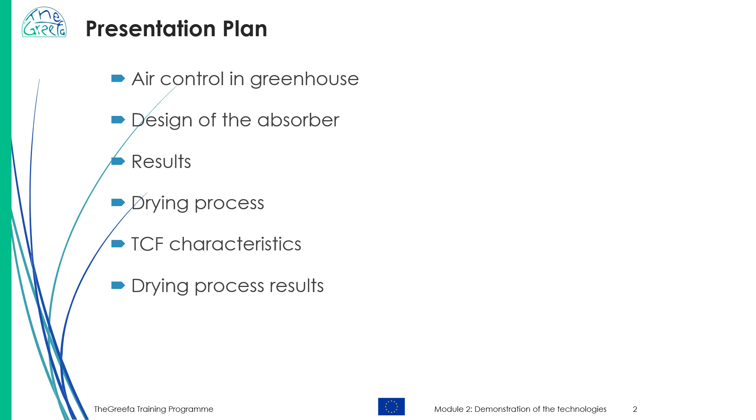Here's an overview of the following presentation: air control in the greenhouse, design of the absorber, results, drying process, TCF characteristics, and drying process results.

In Module 1, we introduced TheGreefa's use of liquid desiccants, known as thermochemical fluids, short TCF. These fluids, typically salt solutions like sodium hydroxide or magnesium chloride, share a common trait. Their hygroscopic properties allow them to absorb water vapor from the air, simultaneously releasing sensible heat converted from latent heat stored in the vapor. To illustrate the process, absorbing 1 ton of air humidity in the greenhouse releases approximately 680 kilowatt-hours of heat due to the phase change involved.

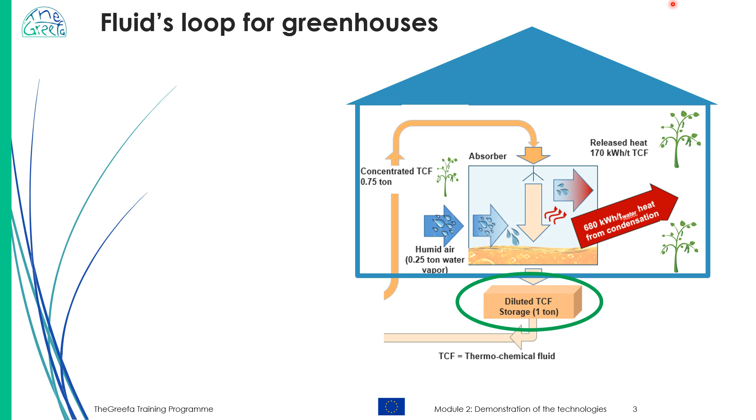This humidity is then condensed into liquid water. The effect is that the greenhouse is both heated and dehumidified. As the TCF absorbs water, it becomes diluted. Once the TCF reaches a certain level of dilution, it cannot effectively absorb more moisture and requires regeneration. During regeneration, the absorbed water is driven out of the TCF.

Diluted TCF can be stored for extended periods without significant losses, awaiting regeneration when heat becomes available. Heat sources could include sunny periods or residual heat from other processes. Transporting the diluted TCF for regeneration can occur on-site or elsewhere without thermal losses. Although no thermal energy is stored during transport, the potential for releasing thermal energy remains.

For regeneration, also reconcentration, approximately 680 kilowatt-hours of energy per ton of evaporated water absorbed must be reintroduced into the system. Regeneration typically occurs at temperatures below 60 degrees Celsius, depending on the phase equilibrium between the TCF and the ambient air pressure. The water released during regeneration can either be released as water vapor absorbed by drier air or condensed and recovered as pure water.

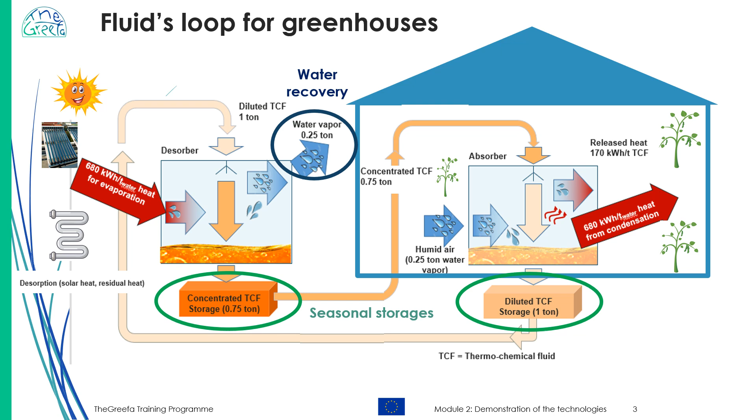TheGreefa is used in continental climate regions to regulate temperature and humidity inside greenhouses. Its use can significantly lower the energy needed for heating, a crucial factor in these areas. By managing humidity without needing to open windows, TheGreefa minimizes heat loss to the outside environment. Additionally, the absorption process itself releases heat, further reducing heating energy requirements.

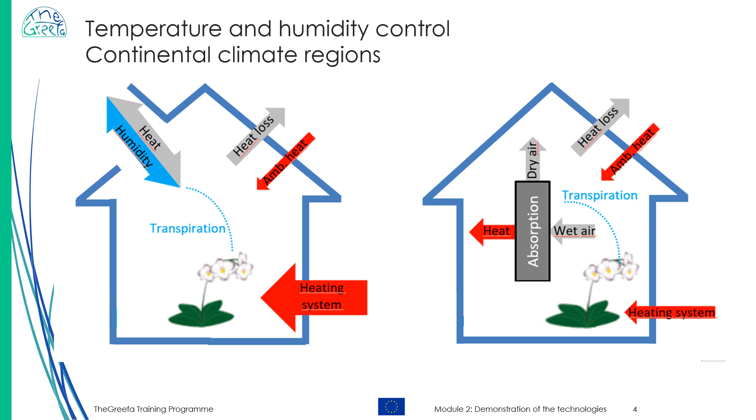To illustrate, a traditional greenhouse is shown on the left, contrasting with the TheGreefa equipped greenhouse on the right. In the TheGreefa system, the regeneration process occurs outside the greenhouse, where humid air is released into the atmosphere. In continental regions, there is typically no need to recover water from this process. Overall, TheGreefa optimizes greenhouse conditions in continental climates, enhances energy efficiency by reducing heat loss, and efficiently controls humidity without compromising internal thermal stability.

The absorber is a straightforward component, a plastic scrubber filled with random packing, necessary to withstand the corrosive nature of the TCF salt solution. Air flows from bottom to top, while TCF flows in the opposite direction, from top to bottom. The packing enhances contact surface area and prolongs contact time between the air and TCF. To ensure effective absorption, it's crucial to maintain a minimum residence time for both fluids inside the absorber. This is achieved by setting a maximum air velocity and a minimum TCF flow density.

In the Swiss demonstrator, a residence time of 1.5 seconds is achieved with specific parameters. An air velocity of 1 meter per second for an empty absorber, and a TCF flow rate of 12 cubic meters per hour and square meter. Based on these parameters, the absorber has a diameter of 0.4 meters and an active height of 1.3 meters, where air and TCF can interact. The slide illustrates the simple construction.

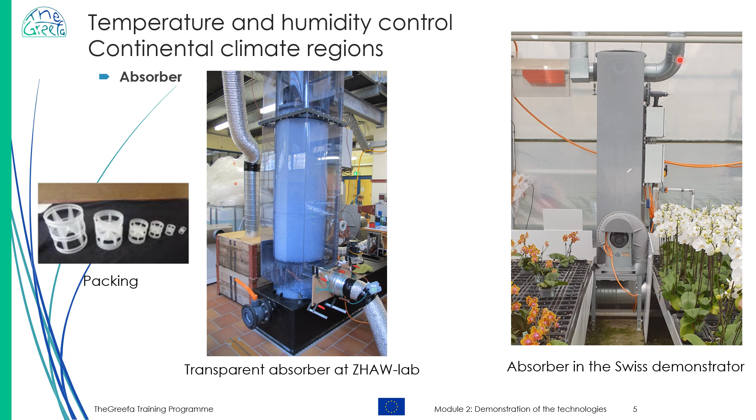On the left, a transparent prototype used at the facility of the Zurich University of Applied Sciences shows the active height filled with packing, shown in white. On the right is the absorber used in the Swiss demonstrator. The absorber is divided into several colored sections, as shown in the picture.

Yellow: the TCF distributor ensures even distribution of TCF throughout the absorber. In blue, the active part, random packing. This section is filled with small random packings where the absorption process occurs. In red, floating packing prevents aerosol formation within the scrubber. Purple: the sump collects TCF from the active part and pumps it back to the absorber. Green at the top, the demister prevents liquid droplets from exiting the absorber.

Air enters the absorber through a fan located at the air outlet. The absorber operates just below ambient pressure, preventing untreated air from leaking out. On the TCF side, TCF is drawn from the sump by a recirculation pump and pumped through a heat exchanger to the absorber head. Here, it is evenly distributed over the packing by the liquid distributor.

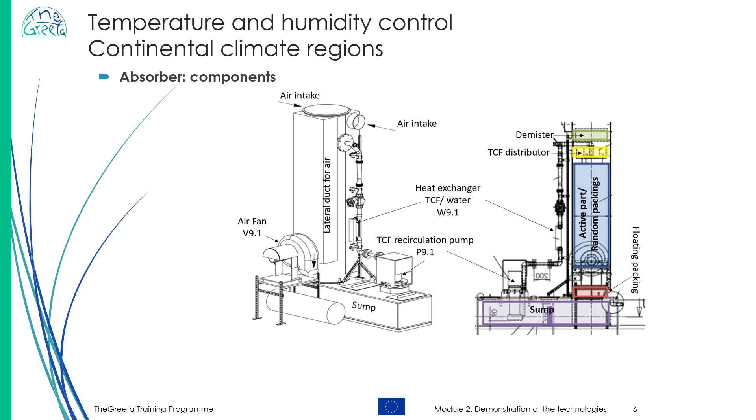The air humidity is controlled by the TCF concentration, while the air temperature is controlled by the TCF temperature. Maintaining a specific TCF concentration inside the absorber is crucial for effective humidity control in the greenhouse. Only with the correct TCF concentration can the absorption process effectively manage air humidity. If TCF becomes too diluted, it loses its ability to control humidity.

The process for the humidity control is implemented as a batch process. When moisture levels exceed the desired range, as indicated by measurement point MR1, the TCF sump is drained and refilled with concentrated TCF.

Air temperature is monitored at the absorber outlet TR2. If the temperature falls outside the required range, either too low or too high, the TCF is either heated or cooled in the heat exchanger illustrated in the diagram. In the Swiss greenhouse setup, this heat exchanger functions as a TCF water heat exchanger.

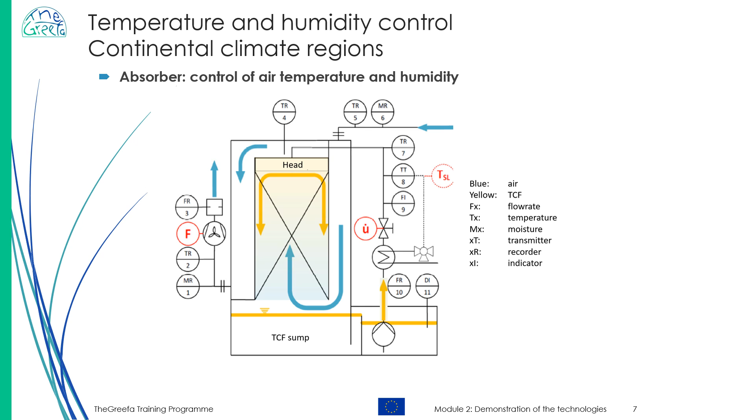The desorber is used to regenerate, also known as concentrate, the diluted TCF. Structurally similar to the absorber, the desorber operates under positive pressure with a fan at the air inlet. Air enters from the bottom and exits at the top. A heat exchanger provides the energy required for the desorption process.

Density measurements and solution temperature determine the TCF concentration. Once the maximum TCF concentration is reached, which in the Swiss demonstrator is 32%, the desorption process stops. Concentrated TCF is then pumped from the desorber sump into a storage tank for concentrated TCF.

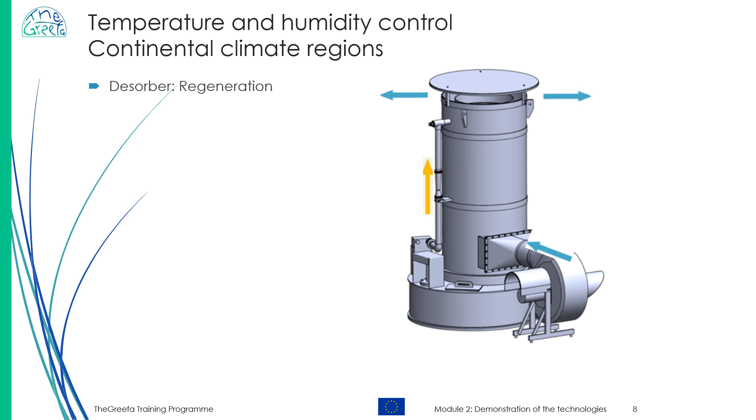The results presented in the following slides are from the Swiss demonstrator. This greenhouse spans 600 square meters and is located near Zurich, Switzerland. It is specifically designed for cultivating orchids. Rather than being placed directly on the floor, the crops are situated on tables as shown in the picture.

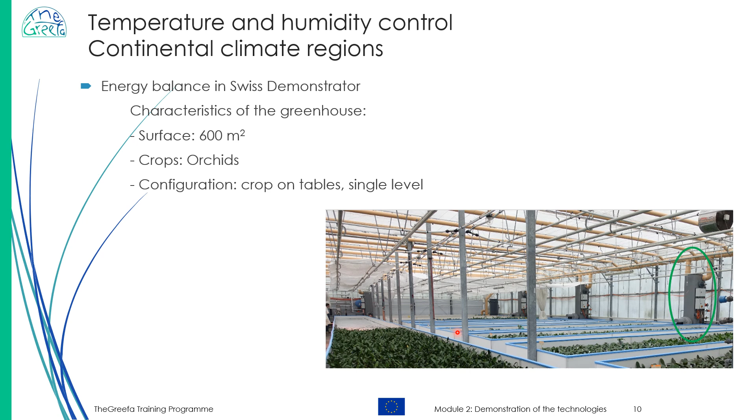Based on data collected and interpolated over more than a year, the energy savings brought to Swiss greenhouses by TheGreefa technology have been estimated. In the pie chart, 100% represents the thermal energy that would have been required in the greenhouse without TheGreefa. The red segment indicates the energy saved by TheGreefa through humidity control via absorption instead of releasing warm and humid air outside.

The blue segment represents the thermal energy released during the absorption process. This energy is necessary for heating the greenhouse, but does not need to be supplied directly by the operator. It is used for regenerating the TCF at low temperatures, energy that would otherwise be wasted.

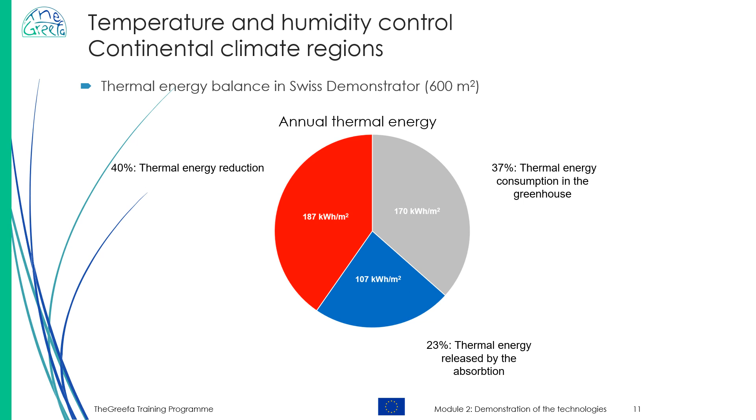One of TheGreefa's key features is the ability to store this energy for long periods without loss, in the form of concentrated TCF retaining potential rather than just thermal energy. Lastly, the gray segment shows the thermal energy that the greenhouse operator must actually supply.

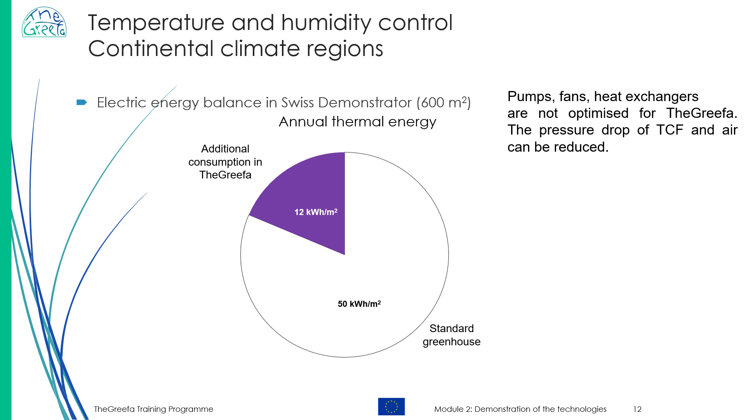However, the situation is reversed when considering electricity consumption, as shown in the graph. With the implementation of TheGreefa, electrical consumption increases by approximately 24%. It's important to note that the rotating components, such as pumps and fans within TheGreefa, have not been optimized for their electrical efficiency. Additionally, the design of air ducts and heat exchangers prioritized thermal performance, resulting in significant pressure losses. Therefore, there is potential to reduce this additional consumption through optimization efforts.

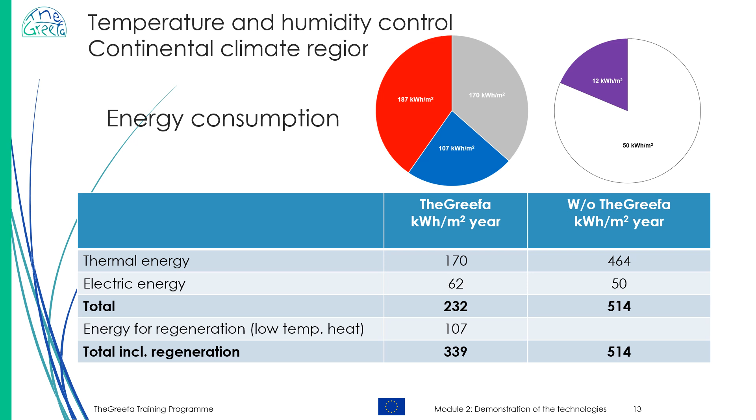When evaluating the overall energy balance in the Swiss greenhouse, it's evident that electrical energy has a smaller impact compared to thermal energy. If we exclude the energy used for regeneration, whether because it's managed separately from greenhouse operations or remains otherwise unused, the total energy savings exceed 50%. Even when factoring in the regeneration energy, substantial savings of around 35% are still achieved.

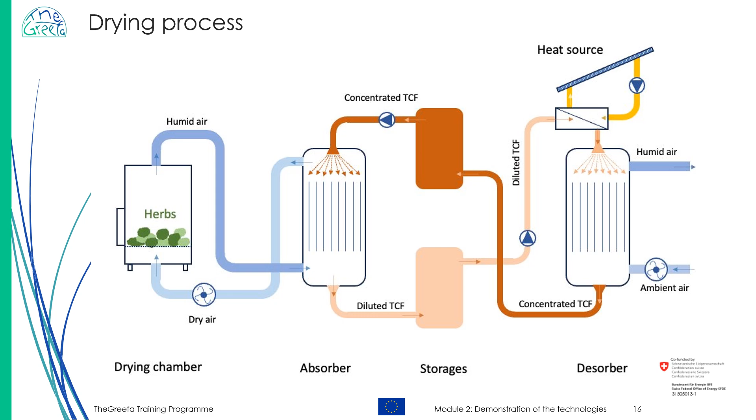Compared to conventional plants using compression dehumidifiers, the absorption-based dryer limits electrical energy consumption to fans and liquid pumps. The required thermal energy can be entirely provided by a low-temperature heat source, making it fully renewable. After regeneration, this energy can also be stored without losses. The choice of TCF for use in the drying plant is different from that used in the greenhouse.

The slide illustrates the equilibrium line between various TCFs and humid air. Dashed lines represent air with different humidity levels. Intersection points between the solubility line of TCFs and those of the air indicate the minimum achievable humidity at a given temperature. For instance, at 20 degrees Celsius, using a magnesium chloride solution, the maximum dehumidification level doesn't go below 35%. Magnesium chloride was selected for the greenhouse due to its availability and low cost, despite its limited hygroscopicity.

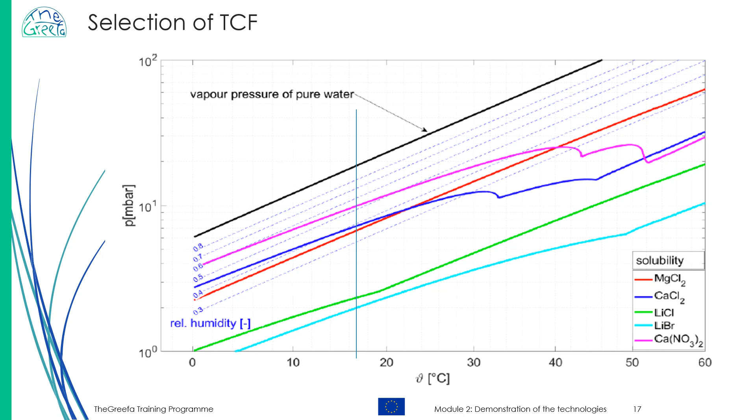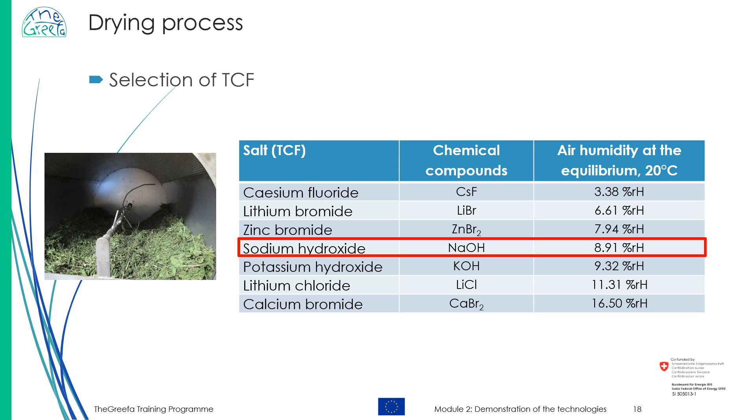At 20 degrees Celsius, the air humidity cannot be reduced below 35% relative humidity. While this humidity level is sufficient for plant cultivation, it is too high for a drying process. Expensive alternatives like lithium bromide or lithium chloride solutions could be considered. For the drying process, we aimed to find and test a TCF with better hygroscopic properties than magnesium chloride, while keeping costs affordable. Additionally, the TCF needed to be compatible with the food industry. After analyzing the characteristics of different TCFs, we chose sodium hydroxide, which is widely used in baking and meets these requirements.

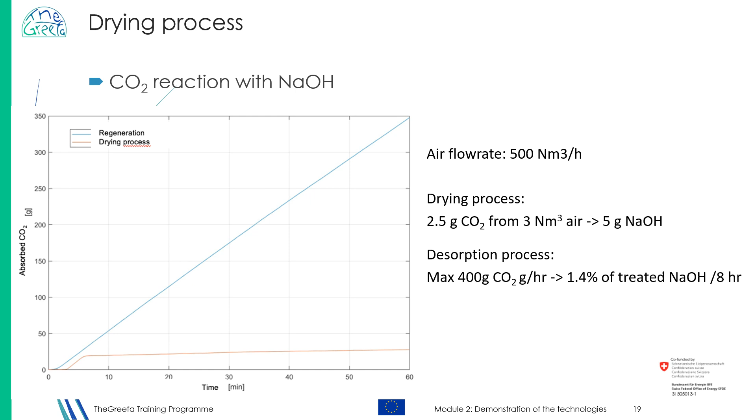The concentration of TCF used in the laboratory tests was initially 50% and decreased to 44% by the end of the drying process, without being replaced throughout. As a result, the absorption power was higher at the beginning and lower at the end. However, in the final stages, removing the remaining moisture from the nearly dried herbs is more challenging. A high concentration of TCF is not strictly necessary at the beginning of the drying process, but becomes essential in the final stages. Therefore, the concept illustrated in the slide is proposed.

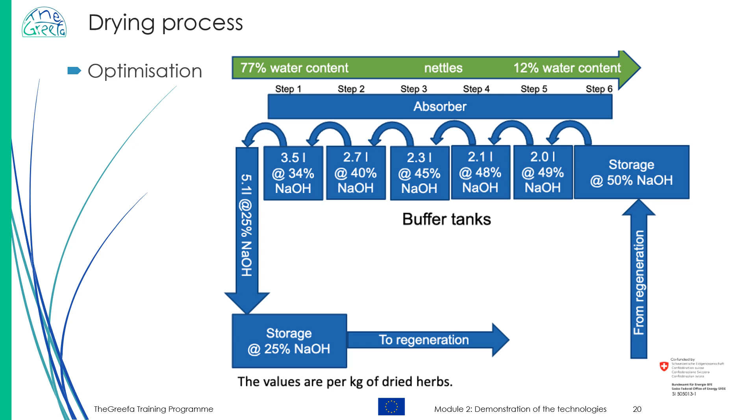The process starts with a diluted TCF, which is then replaced in subsequent phases with increasingly concentrated TCF. This can be achieved by reusing the TCF from the final step of one batch of herbs in an earlier step of the next batch. Only when the TCF is so diluted that it can no longer absorb moisture will it be sent for regeneration or to diluted TCF storage. Using a step process can reduce the volume required for storage. As illustrated in the slide, the energy required for regeneration remains the same since the same amount of water needs to be evaporated.